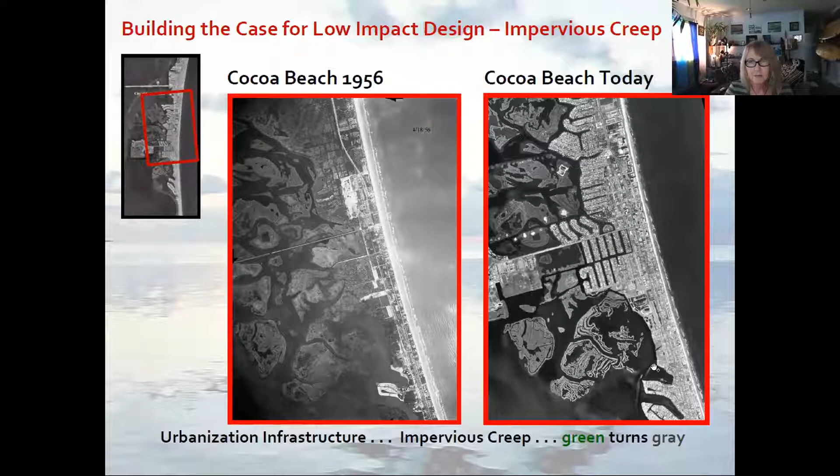In Cocoa Beach, 97% of our developed land is under private ownership, and 3% are the arterial corridors, the skeletal roadways of our city. And this is where all of our drainage system is. And so basically, we have designed these giant campuses of impervious to all drain out into our 3% of public roadways and expect that we can put projects in there and get it to clean and filter the water at the rate that stormwater is coming off. So looking at the civil engineering design, it leaves much to be desired.

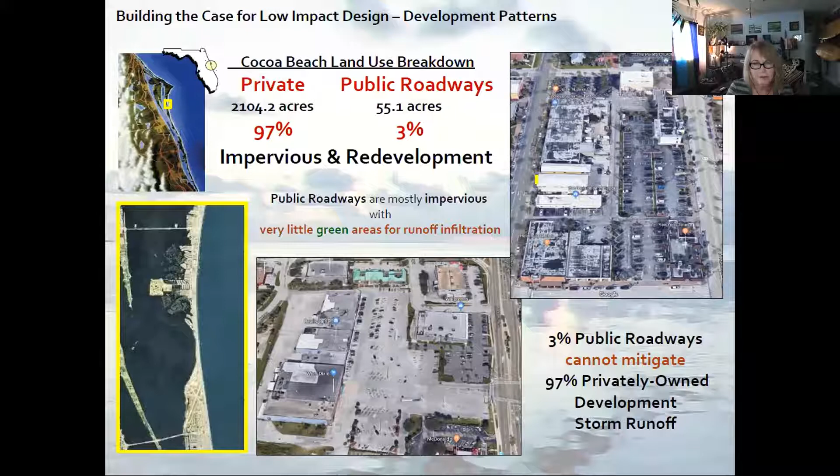So 3% of the public roadways cannot mitigate 97% of the privately owned development. There are different percentages in different places. Urban areas are going to be tougher, but basically there's more privately owned land than public. And it's not just the water quality. It's not just that all of this water drains down into our waterways and creates impaired waters. But we're also causing flooding.

So you have lots of water from upstream flowing downstream to where the water table is almost at the surface. Down in this downstream area, pipes are full. You can't put water where water is. So what we wind up having is great lagoon rise, water level rise, saturated full pipes downstream. And then we wind up getting these areas where you just can't drain these roadways.

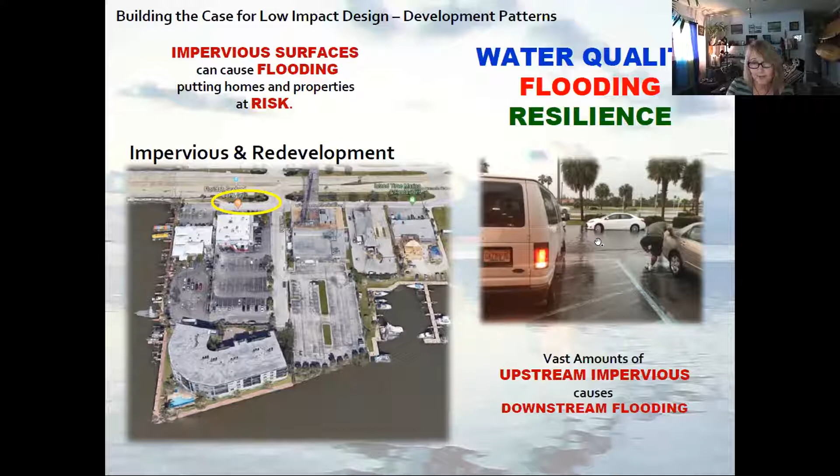This is a restaurant where people are actually having to take off their shoes to get to their car because the service road of State Road 520 is flooded. And at this point, if the lagoon's high or the water table's high, there's nowhere to put the water. And with sea level rise, this phenomenon will only get worse.

And in the 1980s, when they passed the stormwater rule, we started having permitting and stormwater management, stormwater treatment. So basically the design at the time, which was a great improvement over straight out to the lagoon, was to put in an area on the parcel where all of the stormwater went. And so the entire flow from all of these impervious areas was put into these small stormwater management areas.

And this is a dry retention pond that's about 40 years old. This no longer drains. This no longer infiltrates. It's full of thatch, fine sediment, silts. And during the wet season, this remains mucky. You can't really walk across it the entire time. It really needs a full excavation.

But if it hadn't been put in the first place, we'd have a lot less headaches 40 years later. This is actually a wet pond. So all of this development goes to these two wet ponds. These are algae-ridden wet ponds. It's like putting 50 pounds of potatoes in a 5-pound sack.

These ponds themselves can grow nutrients so that they're actually exporting more nutrients than they're bringing in. So if you get these algae blooms and then they die, this water can sometimes be worse than the lagoon water. And when you get heavy rains and they discharge, it's discharging lots of nutrients.

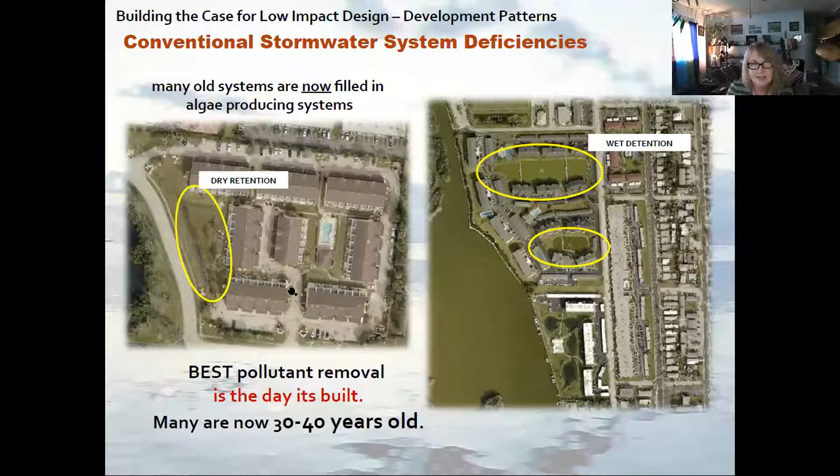And I guess I was going to say, with these kinds of stormwater management approaches, the best day is the day that it's accepted after it's permitted, and then it goes downhill from there. So this is the only one I could really find for Cocoa Beach, because we are a built out community, built out small town.

This is the typical conventional stormwater design. This is all impervious surface, building, parking lot, asphalt, concrete, and it's draining into this small retention area here, dry retention. This is east, this is west. Flow is generally from the ocean, the dune, down to the lagoon to the west. This multifamily dwelling development here is lower than this grocery store, supermarket campus.

When they get heavy rains and it fills up, this water goes right through that sandy dune, and these folks now are starting to get flooded. So if they had changed the design to make this low impact design, there would be lots of areas of infiltration upstream for that water to get in the soil, so it wasn't all being quickly pushed down here and then leaching through the earthen berm of the retention area.

This is the Courtyard Marriott in Cocoa Beach. And basically, it was a beautiful maritime hammock. When they first submitted the design, it was the conventional design like this. We fought hard to save as much canopy tree as possible.

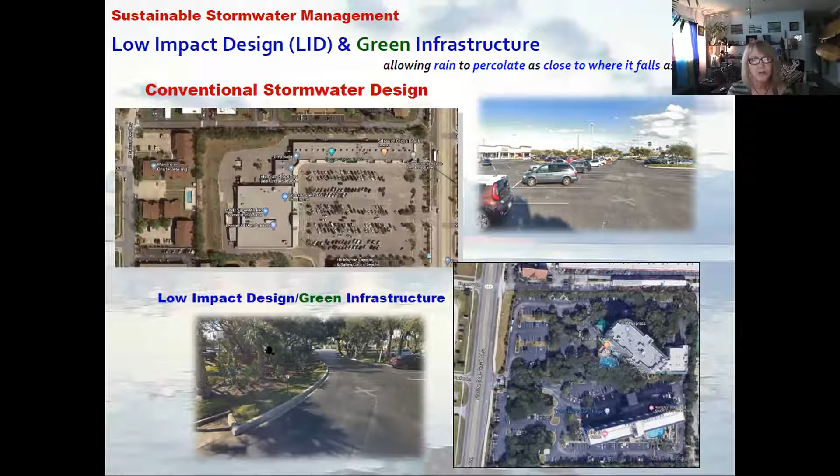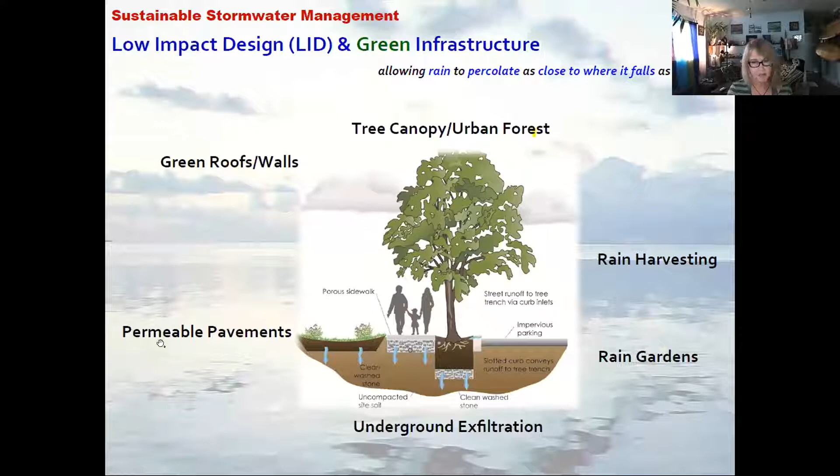And so basically, this is where a lot of the environmental conferences are held now, because it's a beautiful area and it's a great place to show what can be done by leaving the lay of the land and working with what's there to begin with and using trees as a best management practice. So these are basically the tools in the LID tool case, and I'll be talking about each one separately.

So a little bit about the why. Basically, I'm going to be saying what, why, and then how. The why is, it reduces the volume to the waterways, which reduces the pollutants to the waterways. It reduces that intensity at the storm outfall, so it's not stirring everything up. It goes back into the soil, so it recharges the local aquifer.

And that in turn nourishes the soil bacteria that have been expecting water. They've been getting rain forever, and now all of a sudden they don't see that rain anymore. So it gets that biota working so that they can better mitigate the pollutants in the stormwater runoff. The soil microbes in turn use those nutrients so that the groundwater is preserved from nitrogen and phosphorus.

By putting the water back into the ground, you're abating saltwater intrusion. By putting all that fresh water out to the lagoon, you're welcoming the salt water to come into those local aquifers. It reduces that downstream flooding, king tides that we had talked about. And again, it's promoting green space and natural resources.

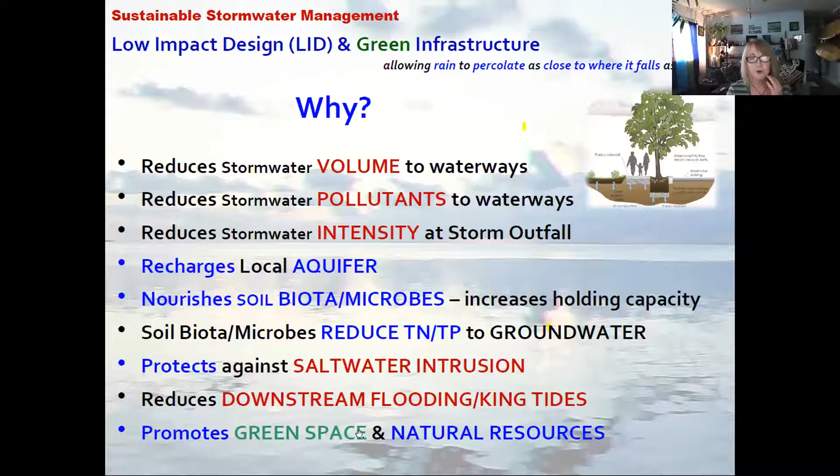Some basic principles of low impact design. You minimize your impervious footprint. You only put in what you need. You preserve the lay of the land, the trees that are on site already doing work capturing and mitigating some of that stormwater. You plant tree canopy.

All of those green areas that used to be put into berms, berms that would themselves run off, we recess them so that they can store and infiltrate that water. Where you need pavement, you can put pervious pavement that allows it to soak in, infiltrate. This is becoming a really big deal.

Elevated structures for buildings, decks, patios. If it's above the ground, everything below it is able to soak in. So you're not creating runoff.

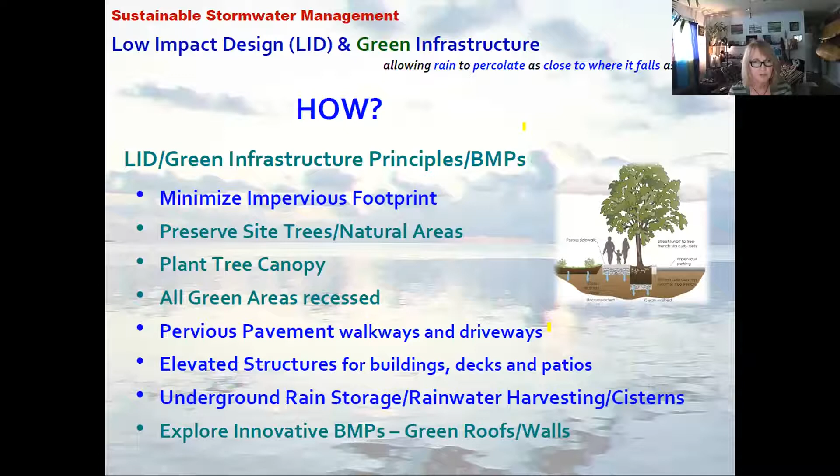And then this isn't really, well, the underground storage isn't really LID, that's more conventional, but provides available storage underground. Rainwater harvesting is really big, providing that storage above ground so that you're not using up your in-the-ground infiltration, with a big storage tank. And then some innovative BMPs that cities and big box stores are starting to do now.

Tree canopy: we all know if it starts raining, regular rain, you can get under a tree. A lot of times you won't get wet. You can see these areas after rain under the trees that are still dry. They are the most efficient, premier stormwater BMP. And all other stormwater BMPs, the day you put it in and start it functioning, that's its best day, and then it goes downhill from there. Trees, as they grow, they become more efficient at mitigating stormwater.

So they capture and store rain, they slow down the runoff, they moderate the climate, they release oxygen into the air, they scrub the air of pollutants, they provide habitat to our gray infrastructure. It has been shown, and we all know this, treed downtowns do really well. A stark downtown with very little tree canopy often is not the busiest place in town. It's been shown that it lowers crime and basically it increases well-being, which has a lot to do with all that other stuff.

This is from data from the Center for Urban Research, Forest Research. This is a representation of an undeveloped site and the canopy. In the 1930s, they found that about 47% of the canopy was retained. And basically they didn't have the giant machines to go in there. They didn't have computer-aided design. By the 1950s, you start getting bigger machines. They were able to get in there and clear the land faster. 30% of the canopy was retained.

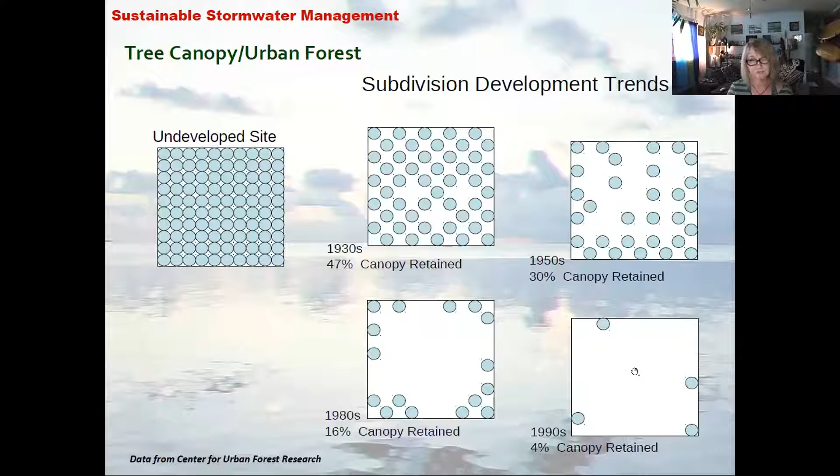So now getting into a little bit of what LID looks like. Again, with tree canopy being the premier, it can hold a lot of water, which then evaporates back up into the air. And it's shown that they can intercept between 15 and 35% of the annual rainfall, depending on the tree, depending on the size of the canopy, depending on the cluster of the canopy.

And another thing about the cluster of the canopy, when you put large trees together in clusters, their branches interweave, and they actually produce very strong protection of what's underneath it from tropical force winds. I live in a canopied area, and it's amazing how they break up that energy. A lot of people are afraid of these because of tropical events. Sometimes you're going to get damaged, sometimes worse without the trees, because the full force of the wind is on the roof. But overall, I believe if you put the right tree in, and live oaks are great, they will produce protection for the assets underneath them.

And then we have rain gardens. Basically, you're using the lay of the street to add green infiltration areas between what's running off in the block, what's running off on the sidewalk, a little at a time in these linear corridors of green. It can be very effective at getting that water into the ground versus into a storm drain or a ditch and out to the waterways.

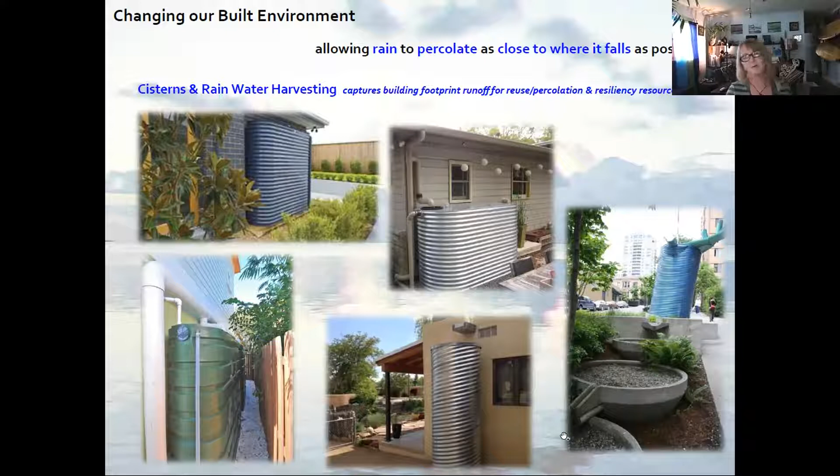And then they could be made into artwork. They used to be very ugly, clumsy looking. Now they're making them flush, they're making them artistic. And this one takes water from a multi-story building and it overflows into a cascaded fountain that again becomes part of a rain garden infiltration zone.

And then underground storage. This isn't really considered LID. It's definitely not green infrastructure, but there are places where you're just not going to be able to do all that, or you're not going to be able to get the volume that you need because of the amount of volume that's coming into this area, where you have to put these underground tanks. And these underground tanks can store water and can be used as reuse, or they can be permeable so that they store it and then slowly infiltrate it into the ground.

The problem with these, and it's really easy for civil engineers to want to throw these in the ground because it's a lot of money, but you throw it in the ground, you cover it up, and then you can do whatever you want on top of it. But these are going to be really hard to maintain in the future. It's just another one of those things where they only have a life, whether it's 20 years, 30 years, 40 years.

How they design these is they put permeable cloth, geofabric, underneath it, and that's to some degree to keep the water from coming up and bringing silt and particles into these systems and clogging them. But it itself will get clogged over time. They grow a little bit of algae. Sometimes that can be good because it can reduce the nitrogen and phosphorus. But again, after 20, 30, 40 years, these things will fail. If you have a parking lot or even worse, a building on top, it's going to be a very, very expensive replacement.

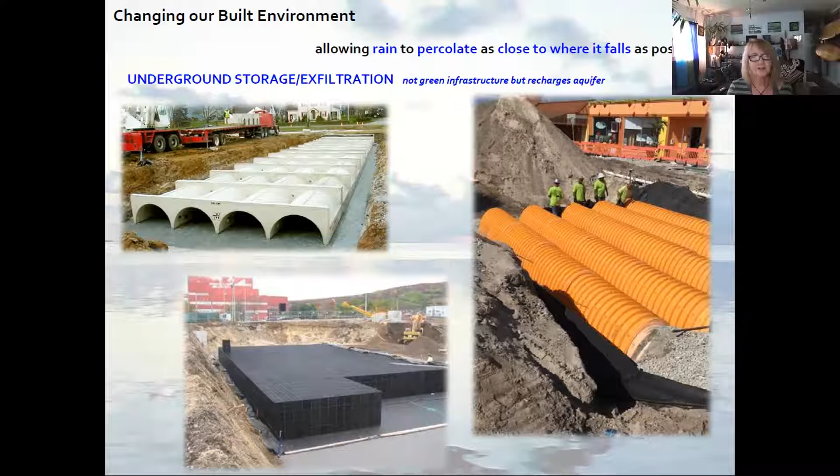And they're kind of hard to inspect. They design them so that they have sumps to try to capture a lot of the debris, a lot of the dirt, so that it doesn't go into the full system. But you're always going to get some, and when they start failing, it's going to be a very difficult fix.

And then these used to be more just in urban areas. Chicago has a lot, Berlin, Germany. They were one of the first to start these green roofs and green walls. But basically, big box stores, anywhere where you have a huge structure, it's a huge amount of impervious that you can put this green on and have much less having to be dealt with by the rest of the site. So you're able to grow bigger. You're able to make a larger building.

And these are not dirt green roofs. They have a media that's meant to be able to support the growth on top of it, and it's lightweight. And a lot of times the overflow from these green roofs goes into a cistern at the base and then can be used to irrigate the system during dry weather. So these are lightweight, and often they can really reduce the energy consumption of the building too. A typical roof with a dark roofing material heats up the building, and this also becomes a great living space. So you can make this become another story within the structure.

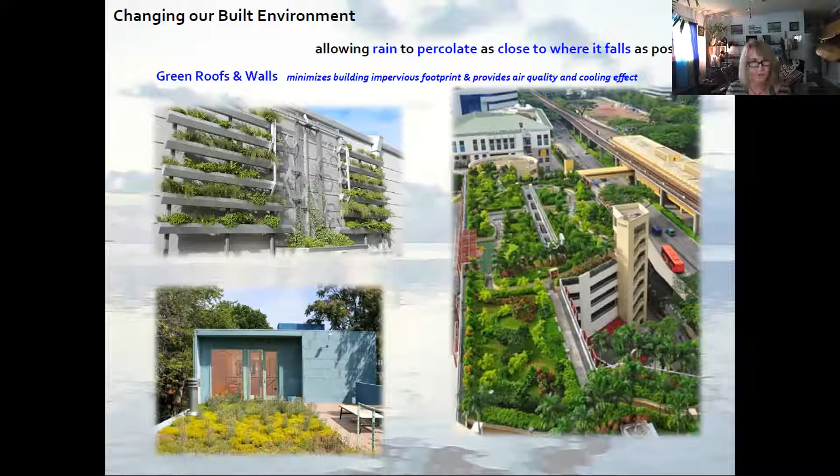Just a quick little thing: Cocoa Beach, we had the same downtown for probably 40, 50 years. It was devoid of trees. It had gotten so urbanized, fully concrete, asphalt, and buildings. We almost redeveloped it so many times over the decades, and good thing we didn't, because we were able to coordinate a redevelopment project for our 5-block downtown area and put stormwater management, low impact design in the ground at the same time. And really you wouldn't know it, because the low impact design is the redevelopment of the street itself with trees, green areas, and walkways.

So we used the tree canopy. We had some existing tree canopy, but we also added silver buttonwoods, and lots of them, along the corridor. And they're a lot larger now; this is when it first went in. These in time will produce a really good thick canopy in the downtown and do a lot to mitigate the volume that even goes to these other components. So we have rain gardens along the entire 5 blocks. What used to go directly into a storm drain now goes into a sediment sump and overflows out into these rain gardens.

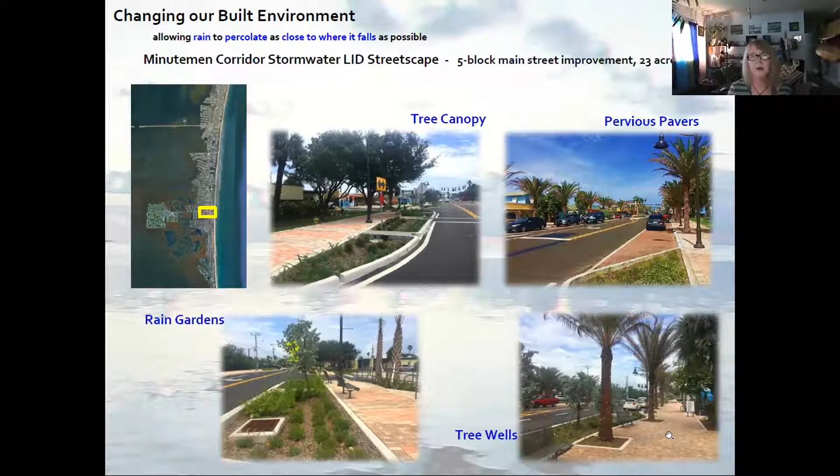The parking pavers are permeable pavers, and it's amazing how well they work. Heavy rains, very, very little overflows these into the rain gardens. And then we have these small tree wells. They're really not much of a stormwater component, but they add a little bit. We used regular pavers for the sidewalks because permeable would be too expensive for the entire project, and we didn't feel it was needed with so much of it going into these permeable areas. But pavers themselves are a little bit better than just concrete slab sidewalks. They do allow some to wick into those pavers.

Okay, so now we're getting into the really hard part, which is how to get LID established within the lagoon. And luckily, we're not the first folks trying to do this. It's been well established for decades in other areas, such as the Chesapeake, DC, Virginia, Maryland, that DC area, over Puget Sound with Seattle, and the Pacific Northwest in general has been a big area. And other states, certain areas in Wisconsin and the Midwest, have also really embraced it.

But this is where the challenge is: changing the norm, getting the barge to turn. Because it's not easy like trying to get people to turn their mower around the other way so that the grass clippings blow back on the lawn rather than into the canal or into the roadway, or getting landscape folks to blow the grass clippings back up into the lawn. This is a lot harder. It's a cultural change. It takes changes in the local governments and at the state level in order to make this happen here in Florida and here in the lagoon. And it's a really good time. It's the right time.

There's a Senate bill that's going to start to be implemented in January that I'm not an expert on, but I might be able to talk to a little bit. Basically, the state is having to incorporate it into their new stormwater rule. But at the same time, it's really important that local governments incorporate it into their local land development code, because the one size fits all for the state will not be able to address local conditions. For instance, right now the ERP, the Environmental Resource Permit, is our stormwater management tool at the state level. Most small campuses don't even fall under that; it doesn't kick the threshold. So in an area where you have a lot of small parcels, which is most of the coast, unless we have local regulations, they don't even have to do it. If it's developed already, the redevelopment a lot of times doesn't even kick their threshold. So it's important that we do it locally.

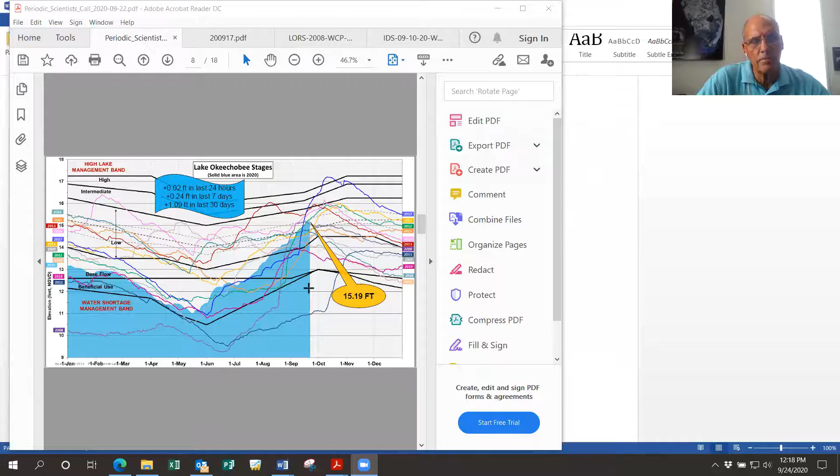Yeah. So this is kind of the map from the periodic scientists call, and they talk about where the water's coming from, and here's where it jumped up, and it's up to a little bit higher than this 15.19 feet. And that gets within a foot of this intermediate band, and then they have to look at what LORS 2008 recommends. And as Paul says, this red arrow indicates where they can discharge up to 1170 CFS at S80 and another 3,000 out to the Caloosahatchee.

But if they make a decision to do that, they have to take into consideration the local basin runoff already coming through S80, and also what's happening downstream of S80. And if there's flood conditions in the St. Lucie because of the storm surge and they get above 3 feet, then they're not allowed to discharge because they could flood out St. Lucie settlement, which is near the South Fork right there where the canal comes out. And so they are prevented from flooding if that happens.

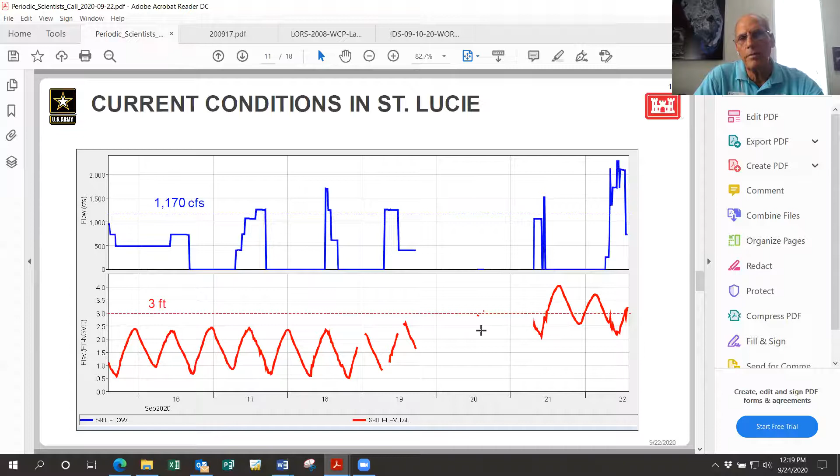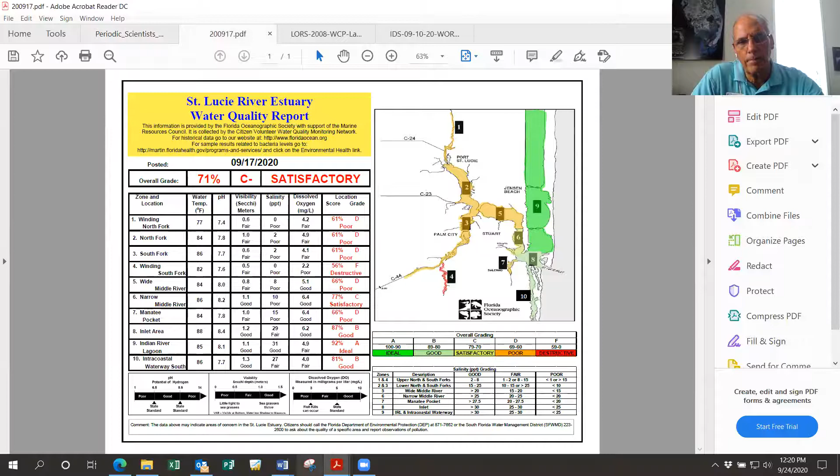Lucie estuary because it's a major system renovation. And as they said, our water quality might look good, but the South Fork is not looking too well. And there's a lot of issues with dealing with that as well. The water quality constraints: here's the South Fork of the St. Lucie. This is in LORS 2008 Lake Okeechobee schedule, where it mentions that 3-foot elevation in the St. Lucie Settlement subdivision on the South Fork. So they are restricted from doing that in that case.

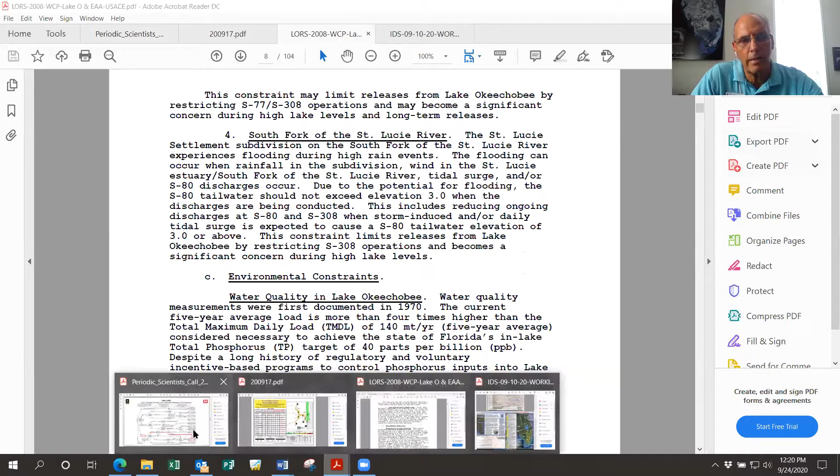So their outlook is to say, well, we're going to decide what to do. But as Paul said, it'd be nice if they could hold off and use that in banking that discharge and wait until a different season. But we're also hopeful we don't get another tropical storm event that jumps us up a couple of feet like it has in previous years. Then all bets are off, and for safety, they'd have to be discharging.

Yeah, Mark. Sorry to interrupt, but can you go back to the decision tree real quick? Yeah. This one, can you see it? No, I'm still on the map. Just the decision tree that had the red box and the arrows.

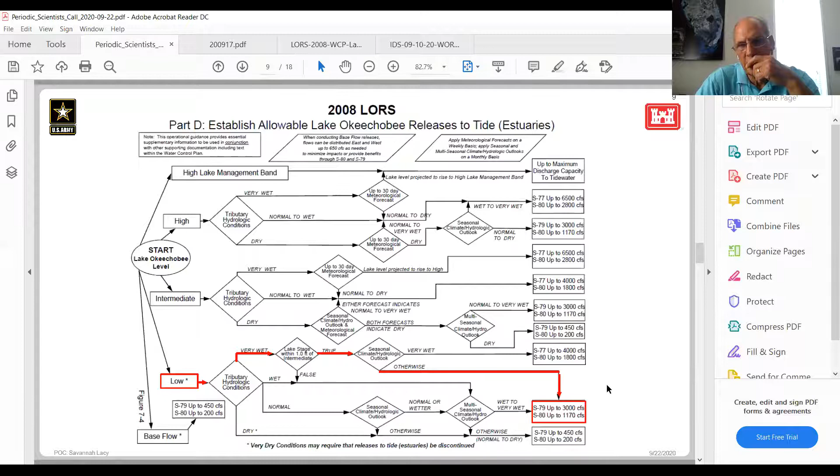Yeah. Okay. Notice that it says up to 3,000, up to 1,170. So that means they don't have to do that full amount. They can do up to that, and they can do less. And that's what we're asking them to use to spare the estuary. So thank you. Just want to point that out. Good point. So thanks, Todd, for sharing that. Let me share that screen with everybody.

On the agenda, we're talking about now our local. Did Jackie have a question? I saw you raise your hand. Okay, Jackie. Yeah. I do, Mark.

So just to repeat and understand, and I should know this, but I don't totally. So under the new LORS 2008 that we're under, what is the top that the lake can go to? Now let's take into account how much the Army Corps has already fixed of the dike around Lake Okeechobee, and how much is left. When Ed and I were at Clewiston, I could see that the Army Corps was fixing the Rim Canal dike right there. But I'm just curious, how does that tie in? It seems like the lake should be able to go higher for a temporary period of time because so much of the dike has been improved very much by the Army Corps of Engineers. Can you talk about that?

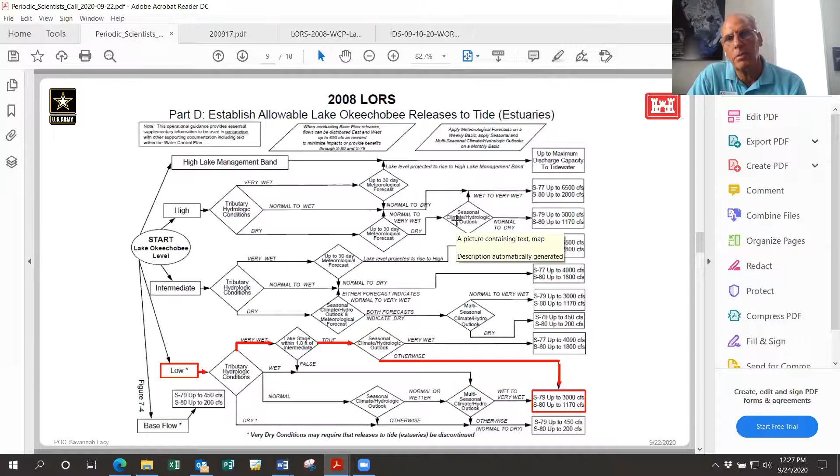Because like you see this one part of the LORS schedule, part D, there's a part C, that's the other part that allows them to put water to the water conservation areas to go south. But that part C is only used to the maximum extent practicable in the water conservation areas. And when they're above their schedule or full, they can't put water south. So they're limited through the current schedule of LORS 2008. They're not putting water south. They're only going to dump it east and west according to this.

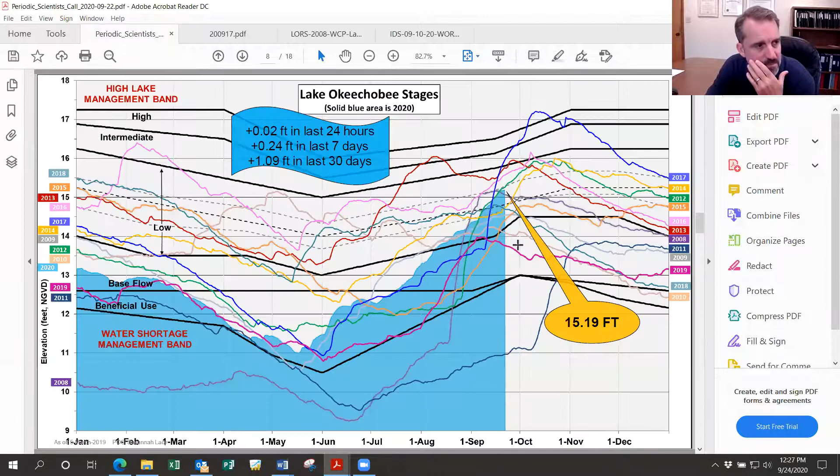I think Jim has a question. You have a question, Jim? Yeah. It was a comment as much as a question. It seems as though, without Mod Waters and without the Tamiami Trail being unplugged, those WCAs are going to be full and there is no capacity to move it south.

Right. So down here at the bottom of the graph, you can see the S12 structures are at 1600 CFS. There's 4 or 5 of these culverts that go south. On the other side of Tamiami Trail, the east side, there's the 1 mile and the 2.5 mile bridging. And they're trying to move water through that, but they have to change those canal elevations on the north end. And they're using this S333 to move water to those locations in order to get water moving south.

But you're correct, Jim. This Tamiami Trail plug at the bottom is not allowing more water, and we've got to do more than that to improve the connection between Water Conservation Area 3A to the north and the Everglades National Park to the south. You're right.

Can I make a comment? Am I on? Yeah, Joe, just briefly, and then we can move on.

Great. What Paul said to me was very interesting, such as 15.3 NGVD on the lake level providing ideal water level at this time of year. That water level, as I understand it, Paul, would mean that you're cleaning more of the nutrients up from the lake. With the hardening, when it's finished, what would be, say, the ideal increased range that would possibly allow a flooding of the slopes slightly to increase the amount of marshes and possibly submergent aquatics along the lake edge?

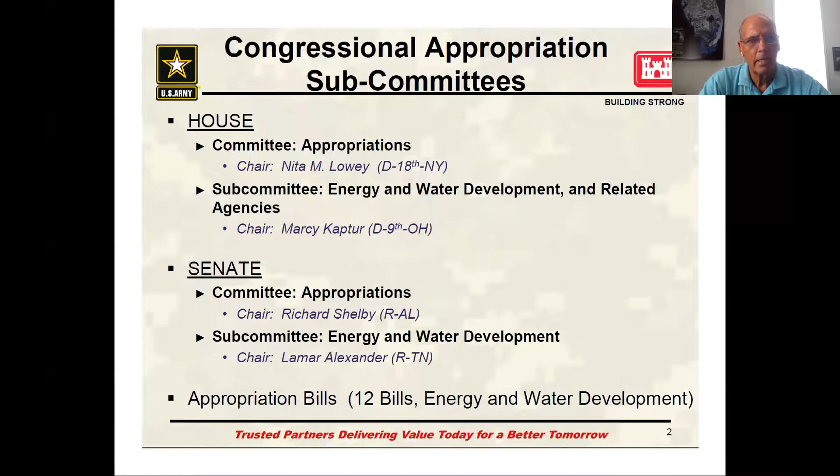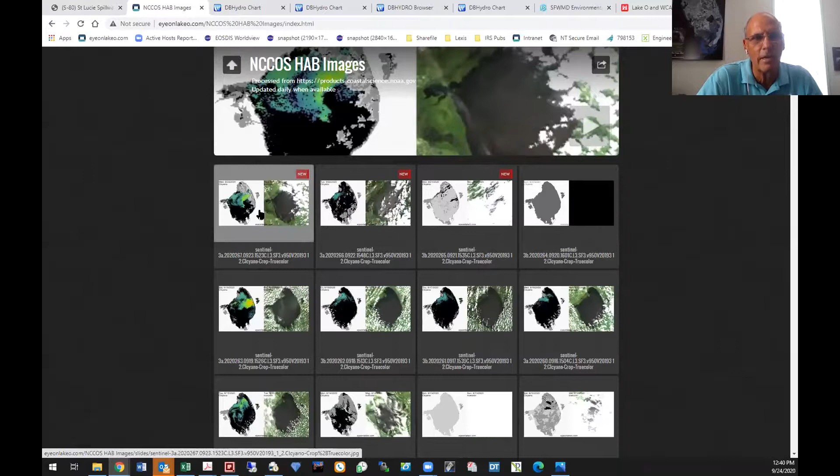Here you go, showing again, started out years back with those satellite images. I remember 2013, it was like, oh my gosh, and Todd, it's been amazing to show that. So this is more recent. Yeah, this is yesterday. A little bit of cloud cover over on the east shore, but there was a bloom potential on the left-hand side, you can see that up in the north part of the lake. That's the case right now.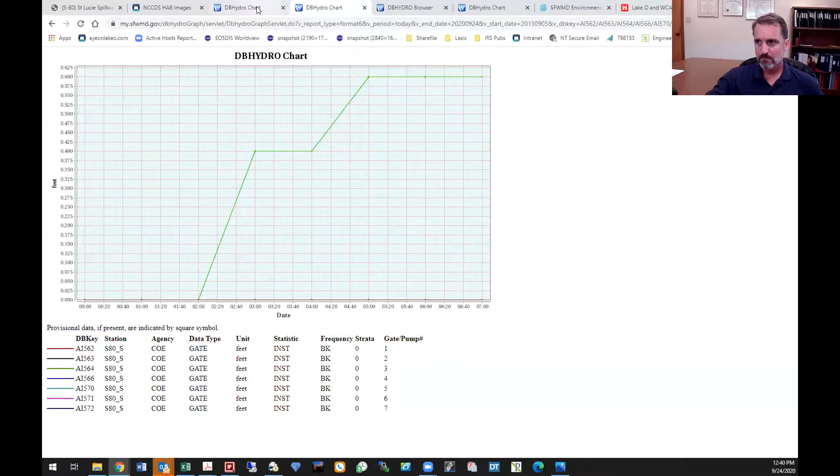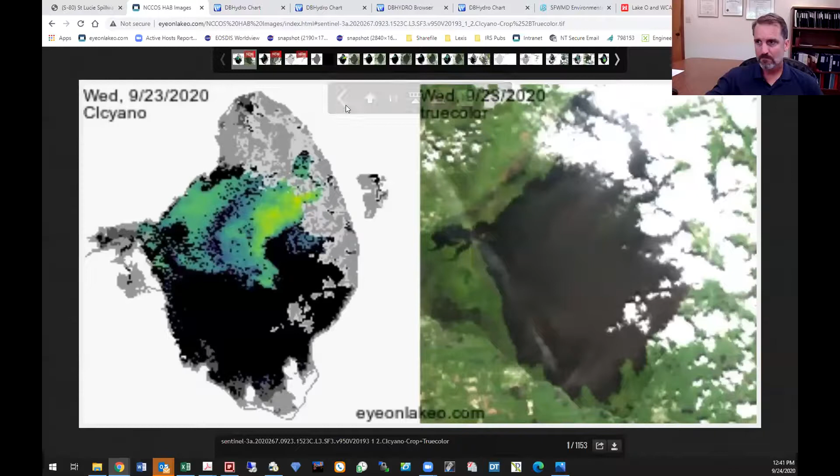So they have been discharging up to even 2,500 CFS, which is about 1.6 billion gallons a day. According to the schedule, if they went to 1170 CFS, that's about 756 million gallons a day. It's not too much, but it's a lot when you put that on top of all the other freshwater inflows we have to the estuary. For a long duration, it's going to be detrimental. For a short duration, it's not bad because it's like a big storm event. But over a long duration, it's detrimental to those oyster reefs and seagrass. So thanks, Todd, for hosting and bringing this up.

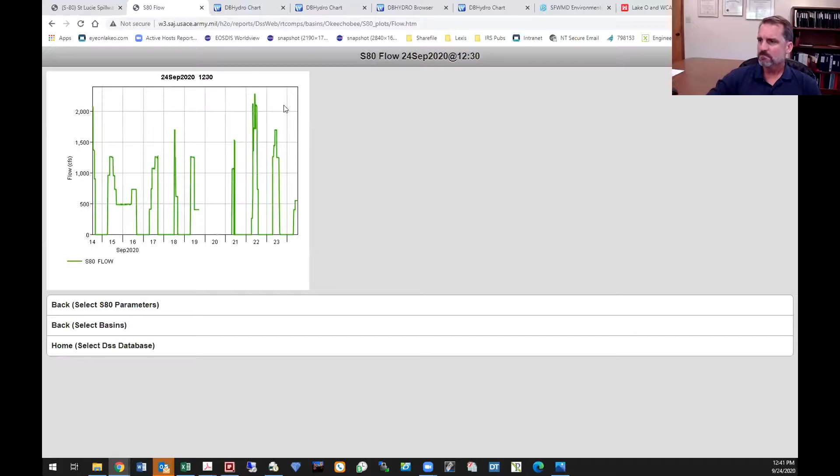Oh yeah, that's the parameter. Is that elevation or CFS? So that's CFS on S-80. Yeah. And they're going right now. I mean, that's the live picture. Yeah. They've got 2 gates open right now. They're constrained by tide. Yeah, and then here's that tide chart.

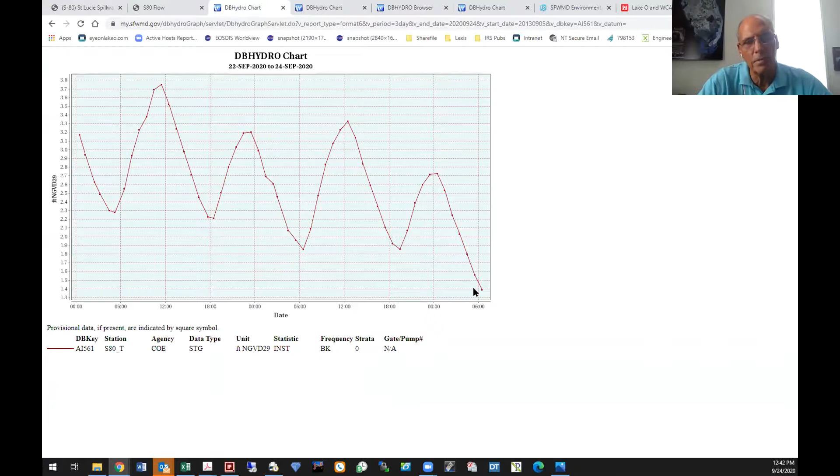But I mean, the tides have gone down. So at 6 o'clock this morning, it was down to 1.4. Yeah. So as that subsides, they'll have more capacity to let it out. But again, we don't want them to discharge. Absolutely, we don't need the water. Save it for the Caloosahatchee or the Everglades later. We don't need it. So that's it.